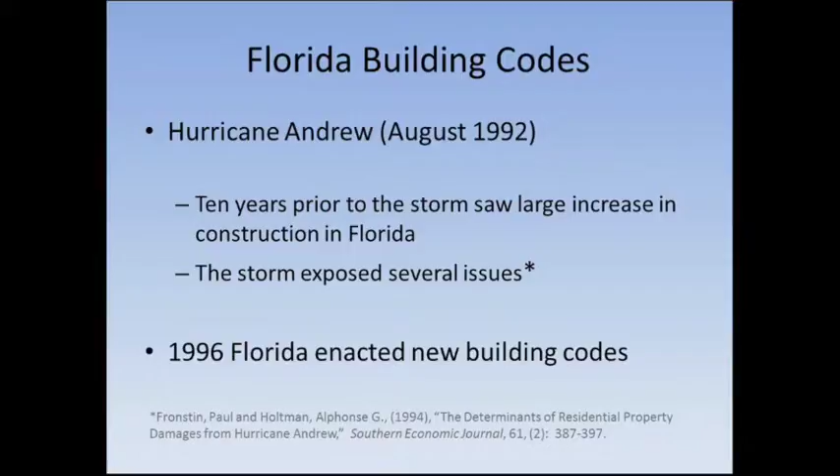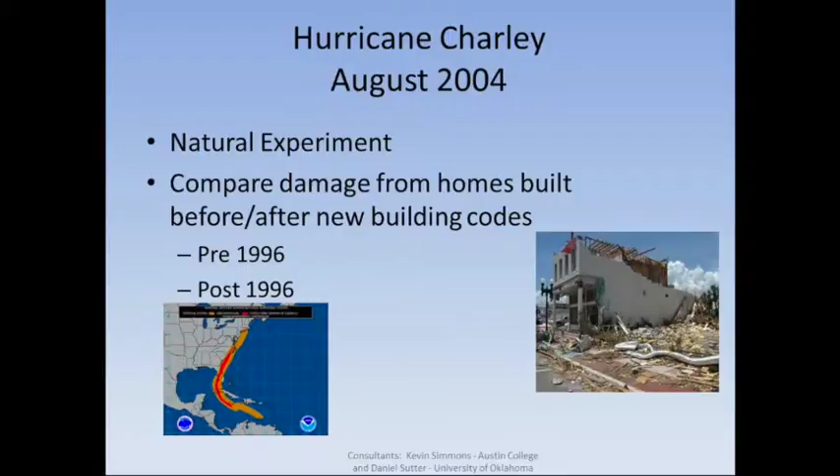So really quickly, let's go through this. In Florida, Hurricane Andrew illustrated that we had really inferior construction in the 10 years leading up to Andrew. Tanya's employer, IBHS, did a study after Hurricane Charley that provided a natural experiment. We could look at the damage for homes built after the new building codes and compare that to homes built before. IBHS found that in terms of claim frequency, the newer homes are 60% less likely to have a claim, and if they did have a claim, it was 40% lower than homes built prior to the new codes.

Jeff Czajkowski and I, a colleague at Wharton, are doing a study right now in the state of Florida where we're looking at the entire decade. Our study is basically backing up what IBHS found. We're finding almost exactly the same results.

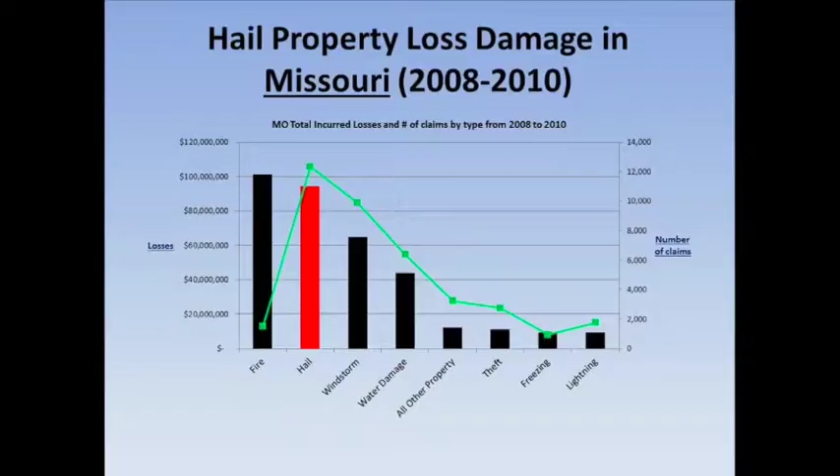Jeff and I published a paper a year ago on hail, so Tanya's going to be really interested in this—I think she's actually seen the results before. We looked at hail because it's one of the big drivers of insured losses in Missouri. Missouri, unlike Florida, does not have a statewide building code. However, there's an organization called Verisk that, for communities that request it, will grade their building codes and come up with what they call the BCEGS rating, the Building Code Effectiveness Grading Schedule. This lets you tell the differences in building code expectations from one community to the next. The BCEGS program has 10 classes based on 100 points, giving a national distribution, and this is one of the things that Jeff and I used in our empirical model.

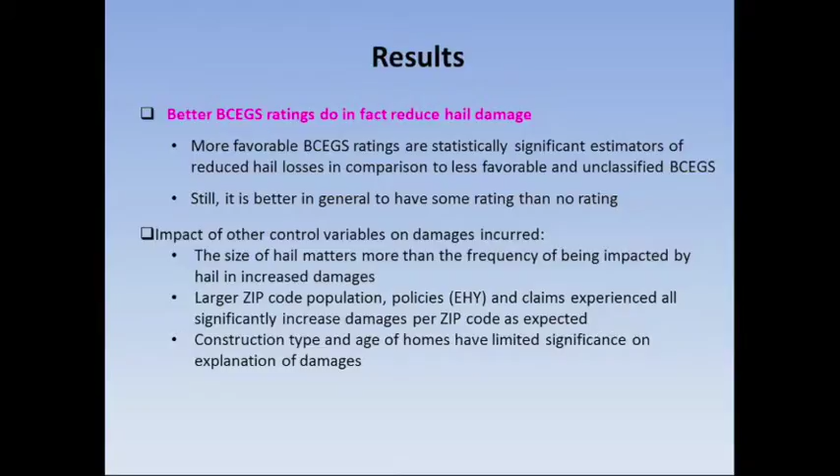It's an econometric model that tries to understand what effect the BCEGS rating had on losses. What we found was that better BCEGS ratings do reduce damages—in fact, they reduced them by about 20%. So having better ratings reduced overall damages from hail by about 20%.

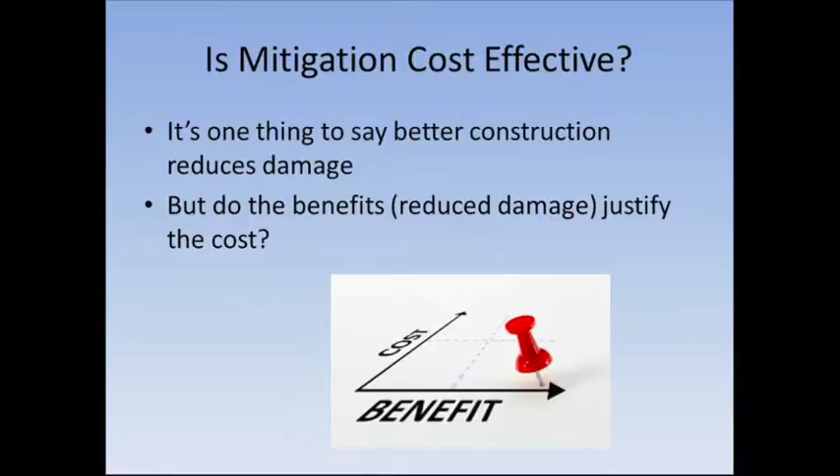Now the economist comes up. It's one thing to say better construction matters, but do the benefits justify the cost? So what we're asking is whether there's cost effectiveness for the mitigation. To look at that, we're going to look at a study that Paul and I, along with a colleague at University of Western Ontario, Greg Kopp, did. This was published this year in Weather, Climate, and Society, and it was also the focus of a New York Times op-ed that came out last month.

We focus on Moore, Oklahoma. We've talked about Moore, Oklahoma quite a bit already. Moore regrettably suffered 3 violent tornadoes in 14 years. The most recent was in 2013, which, as Aaron alluded to, had fatalities at a local elementary school. This motivated the city of Moore to adopt stricter standards, going from a 90-mile-an-hour standard to a 135-mile-an-hour standard.

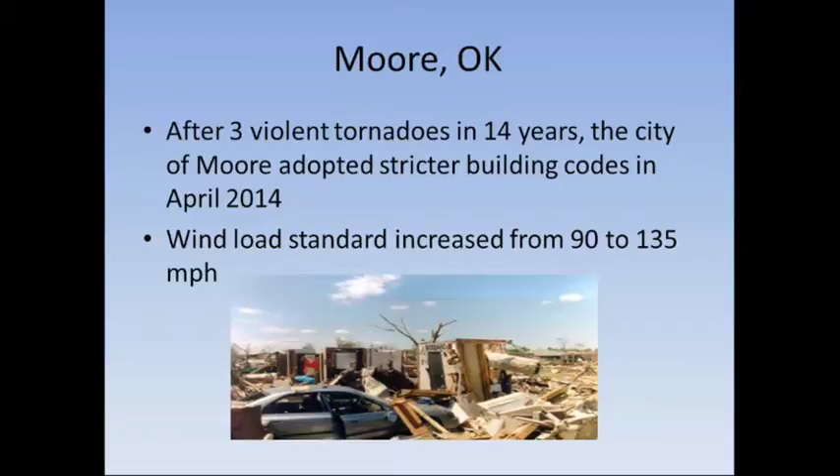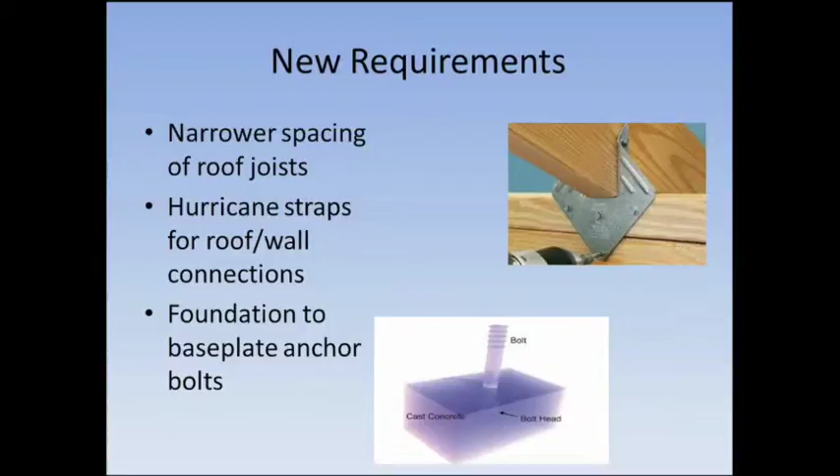What did they do? They required narrower spacing of the joists, connecting the roof to the exterior walls with hurricane straps, and anchoring the base plates to the foundations with anchor bolts, as you see there. In addition, they required wind-rated garage doors as well as improved exterior sheathing.

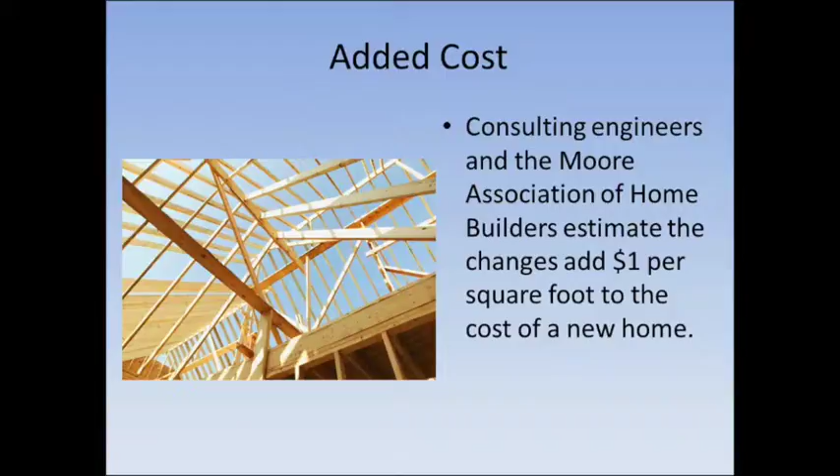All in all, the consulting engineer who worked with the Moore Association of Builders estimated that this adds $1 per square foot to the cost of a house. For the typical house in Oklahoma, about 2,000 square feet, that adds $2,000. If you were to have built every home in Oklahoma to those standards, the increase in cost would have been a little over $3 billion.

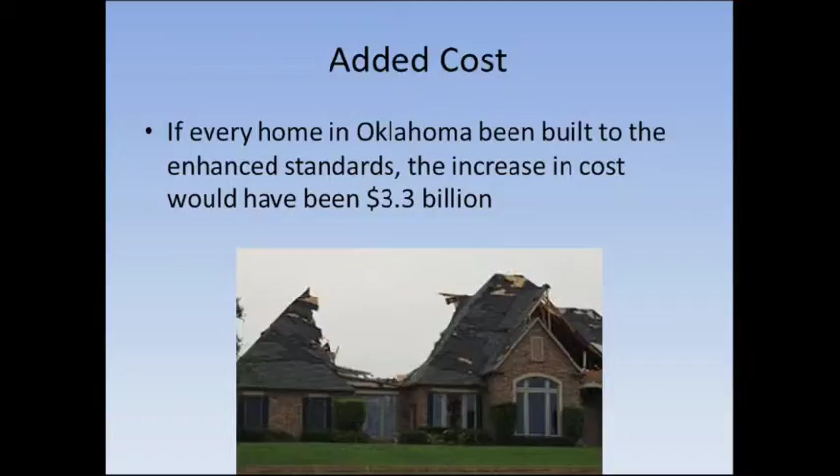So I want you to keep that number in mind, because for the mitigation to be cost effective, the expected reduction in damage needs to be more than $3 billion. So the next phase is to figure out, will we see a reduction in damage to justify that?

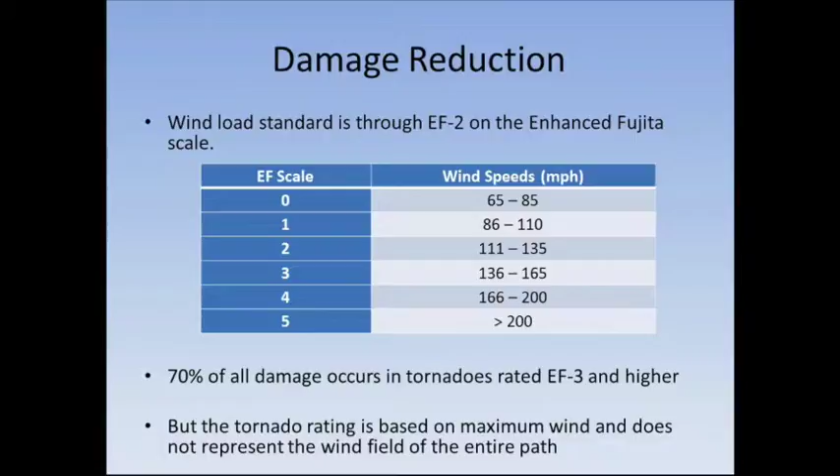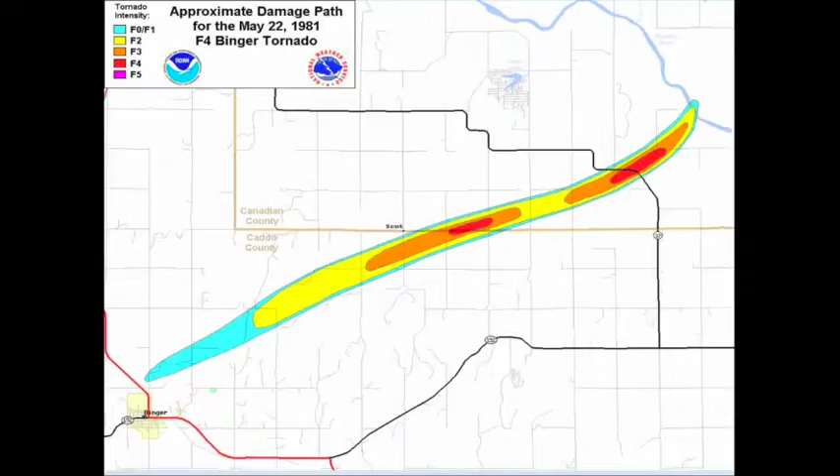Now, Mark kind of stole my thunder here, but the codes in Moore were basically to get you through an EF2 tornado. 70% of all damage from tornadoes comes from tornadoes rated EF3 and up. But the rating on that tornado is not indicative of the entire wind field. That's the maximum wind sustained across the tornado. In fact, this is an illustration of a typical tornado, and the dark red is the most intense wind field. And as Mark alluded to, that's a small percentage of the overall path of the tornado.

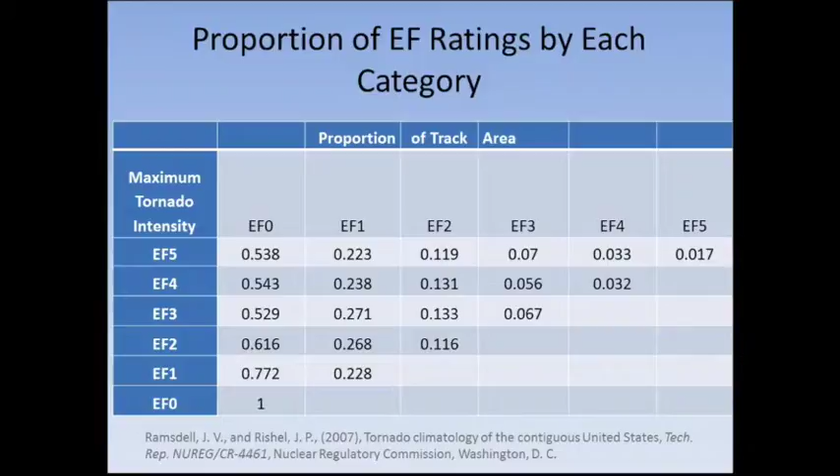A study was done in 2007 for the Nuclear Regulatory Commission on what are the percentage breakdowns on wind fields within tornadoes, and this slide right here gives you that breakdown. For instance, look at an EF3. An EF3 has less than 7% on average of the wind fields in that tornado that would have been rated EF3.

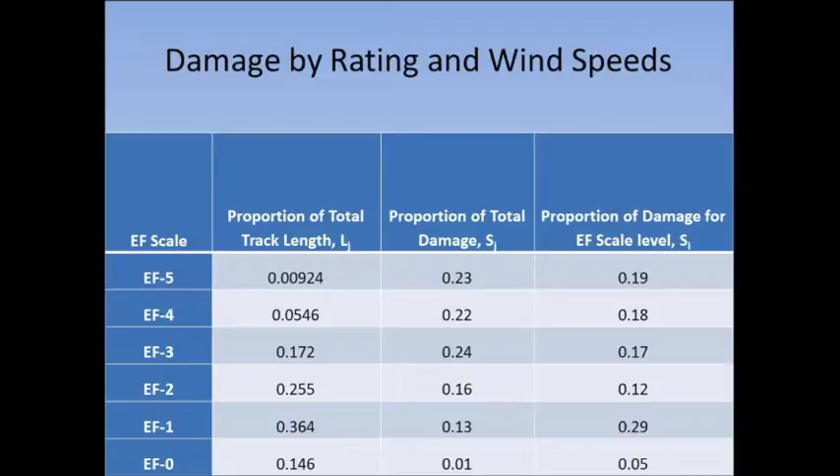This is a slide that Greg and Paul and I came up with, kind of illustrating how that affects your understanding of the damage. The middle column would be the estimate of damage if all you took was the maximum wind, in other words, the rating of the tornado. 23% of all damage would be from EF5 tornadoes, 22% from EF4. But if you take into consideration the wind fields, that changes that column, and you can see that on the far column on the right.

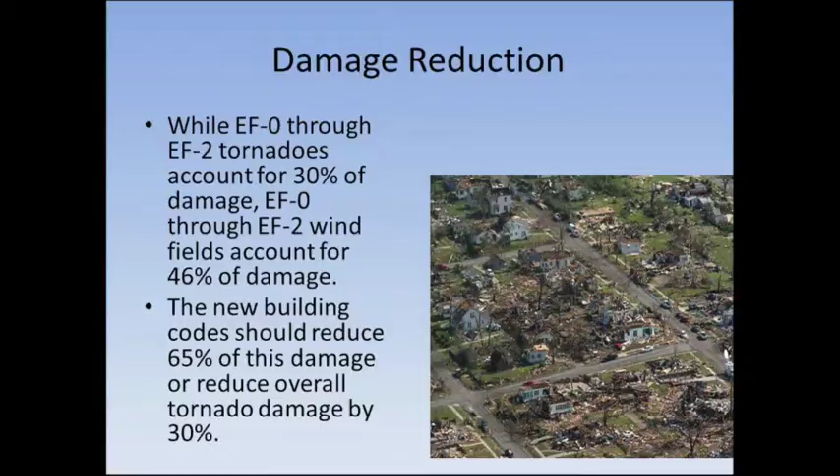Even though 30% of the damage comes from tornadoes that are rated EF2 and less, once you change that to wind fields, 46% of all the damage comes from wind fields that are EF2 and less. Those are the ones that we can build for. We probably cannot build for economically an EF5 tornado, but we can build for tornadoes in the lower range.

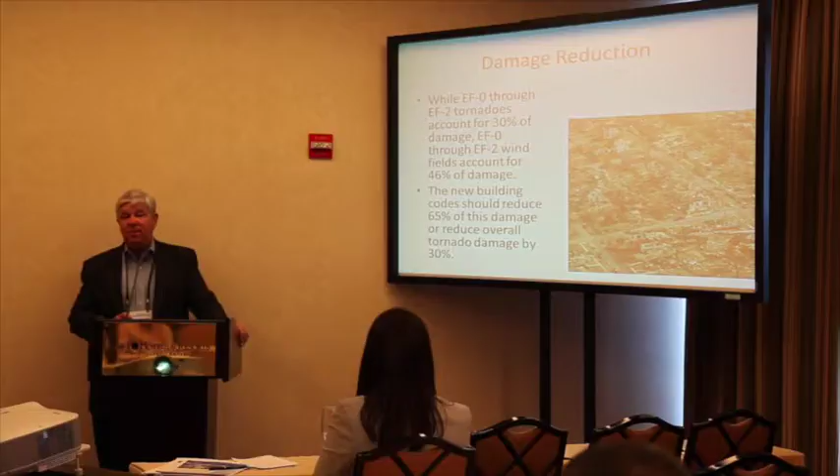The Moore codes that were adopted, Greg went through an extensive analysis of the effect that they would have, and our estimate is that 2/3 of all the damage within that 46% can be mitigated with the Moore codes. That translates to a reduction overall in tornado damage of 30%.

So the next thing we need to figure out is, okay, how much losses Oklahoma can expect over the next life of a home, say 50 years. We had 25 years of insured loss data for Oklahoma. Based upon that, we extrapolated that into the future to get us an estimate of 50 years worth of losses.

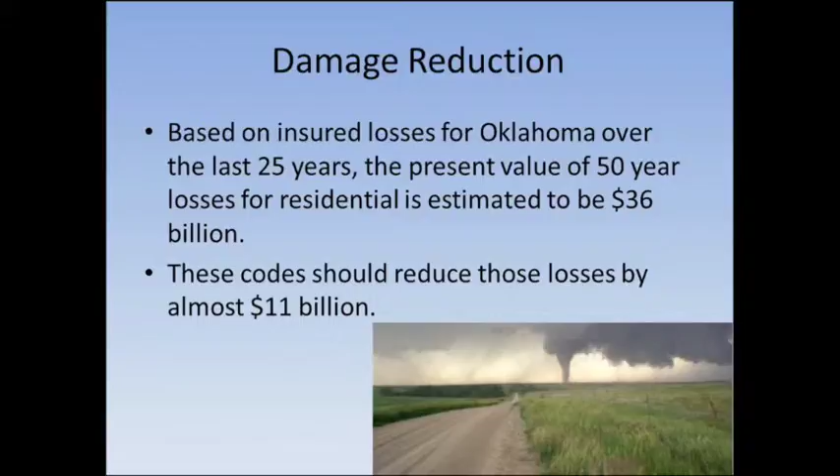Now I'm going to throw in a little bit of finance here. We took the present value of that because we're trying to make a current dollar to current dollar estimate. The present value of our estimate of future damage in Oklahoma is $36 billion. If we mitigate 30% of that, that's $11 billion. So keep in mind two numbers: what was the cost? It was about $3 billion had we built every home in Oklahoma to the Moore standards. The amount of mitigation that we can expect is $11 billion. So that gives us a benefit to cost ratio of a little bit more than 3 to 1.

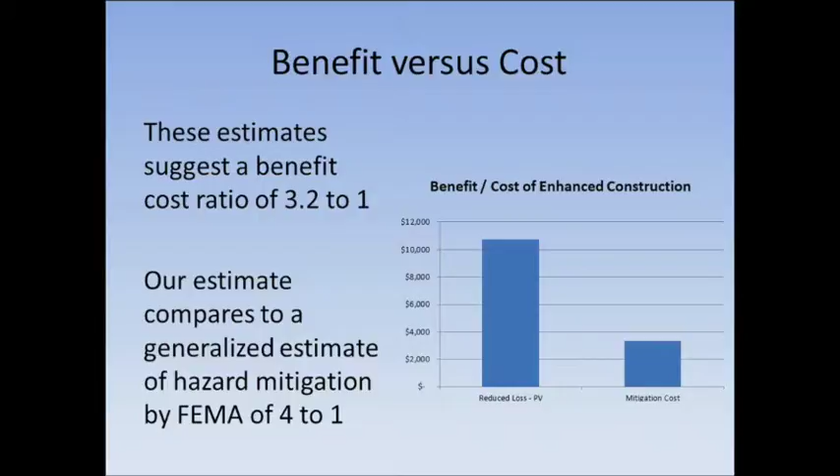Now when you do a benefit cost analysis, it's very important that you follow up with what's called a sensitivity analysis, because there's a lot of variability in our assumptions. There's 5 variables that go into our benefit cost analysis: the amount of damage that can be reduced, Greg could have been wrong; the additional cost, the consulting engineers could have been wrong; the amount of future losses, Oklahoma may not have another tornado for the next 50 years.

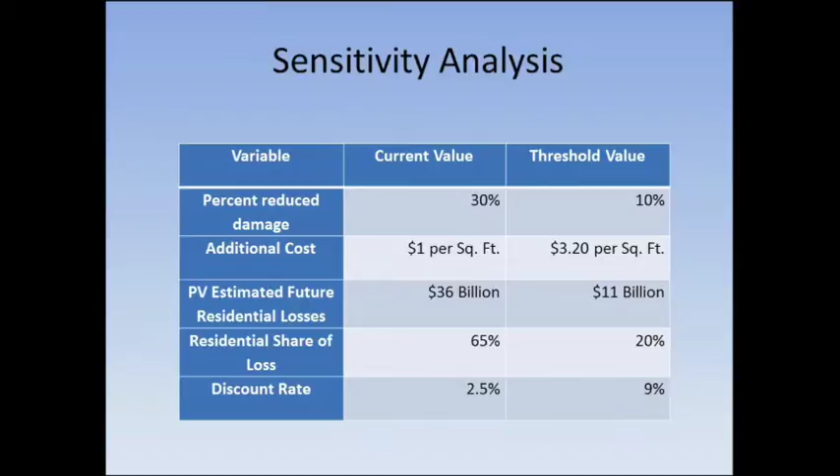Well, this gives you what our sensitivity analysis will tell us. What does each of these variables have to fall to flip the benefit cost, to make it go from positive to negative? Our percent reduced damage needs to go from 30% to 10. The cost needs to essentially triple. The present value of future losses needs to go down. The residential share of losses, maybe it never hits another house, maybe it only occurs in commercial buildings from here on out. And the last one, what does the discount rate have to do to change that benefit cost analysis?

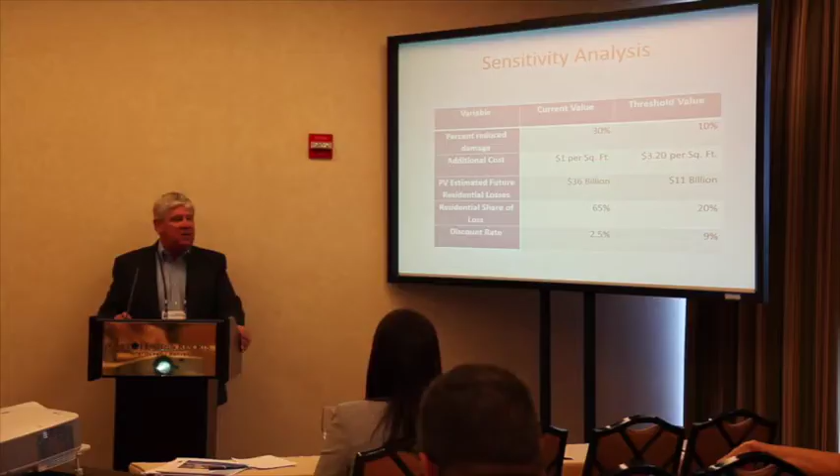Some understanding of the potential payout of what the city of Moore did makes it sound like a good policy that should be considered for the entire state. For this to be applicable to other areas really depends upon their probability of getting a damaging tornado. You can't say just because it happens in central Oklahoma that it pays off everywhere. And that's the next follow-up that we've discussed, is to look at other states to see where the benefit cost analysis will work and where it won't work.